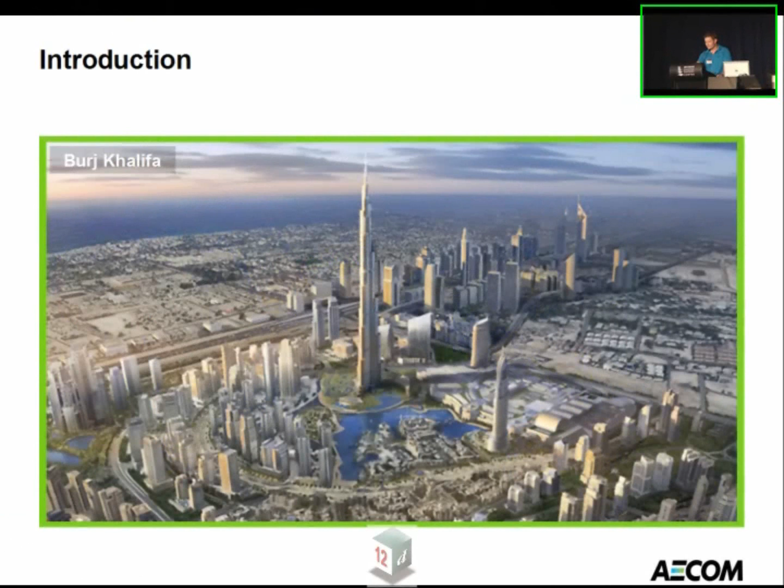We're also going to be talking about the UAE. Everybody knows the glitzy attractions in Dubai, still making headlines recently with the opening of the world's tallest building, the Burj Dubai, now known as the Burj Khalifa, named after this man, Sheikh Khalifa.

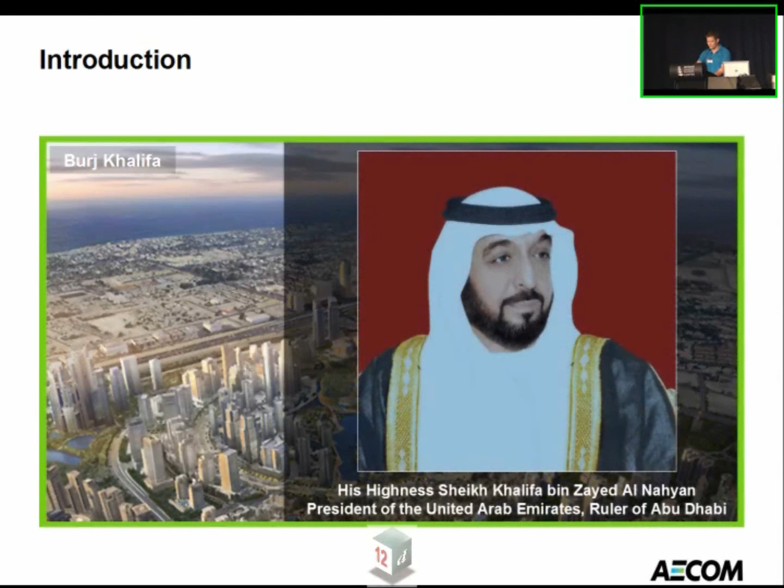Which brings me to the area I'm going to talk about, Abu Dhabi. Once the conservative neighbour of Dubai and labelled the richest city in the world, Abu Dhabi is starting to do some big projects of its own, but with a difference to Dubai.

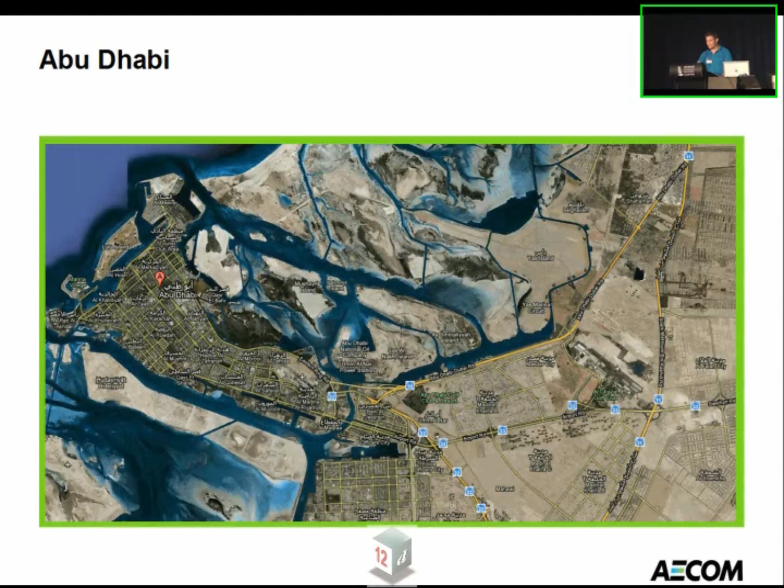This is the map of Abu Dhabi. The project I'm going to be speaking about is the Raha Beach project, for which Aecom is the main consultant. Raha Beach will be the gateway to Abu Dhabi, lies amongst the islands of Abu Dhabi and on the beach side of the Dubai-Abu Dhabi highway.

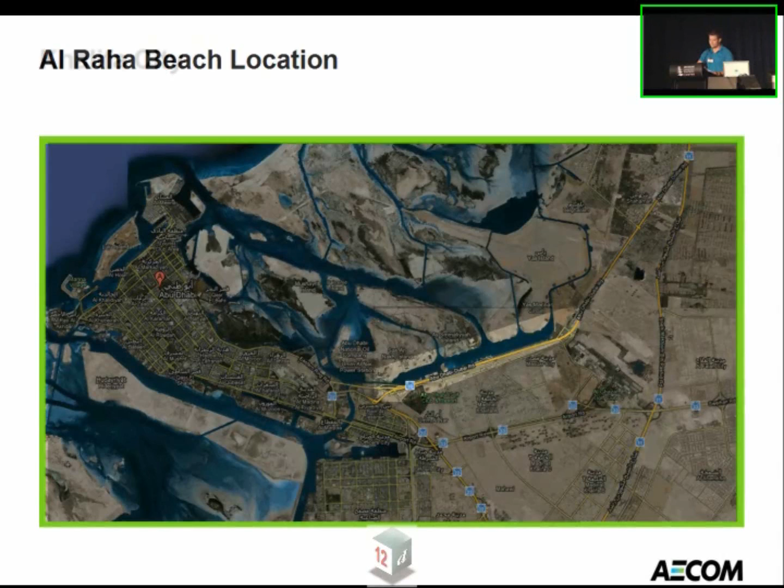The area around Abu Dhabi itself, the area around Raha itself is bursting with development. Surrounded by Khalifa City, a $40 billion US master plan comprising residential, government offices and embassies. This development is expected to continue through to 2030.

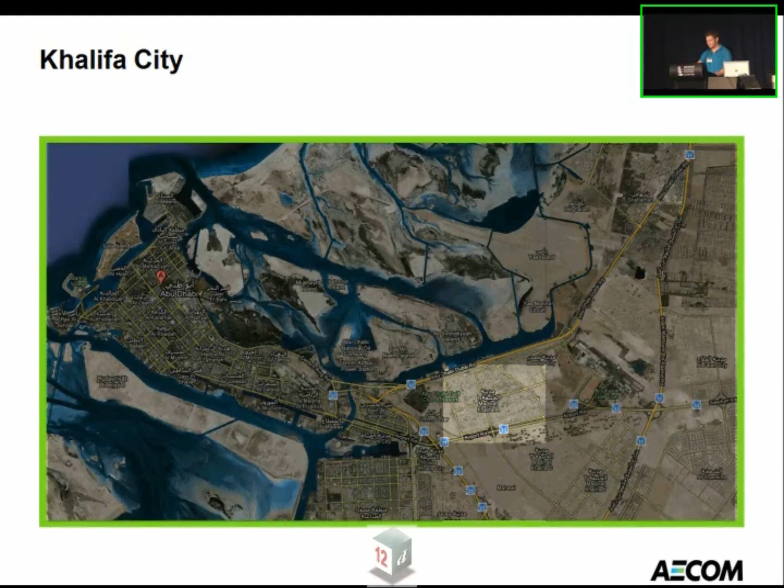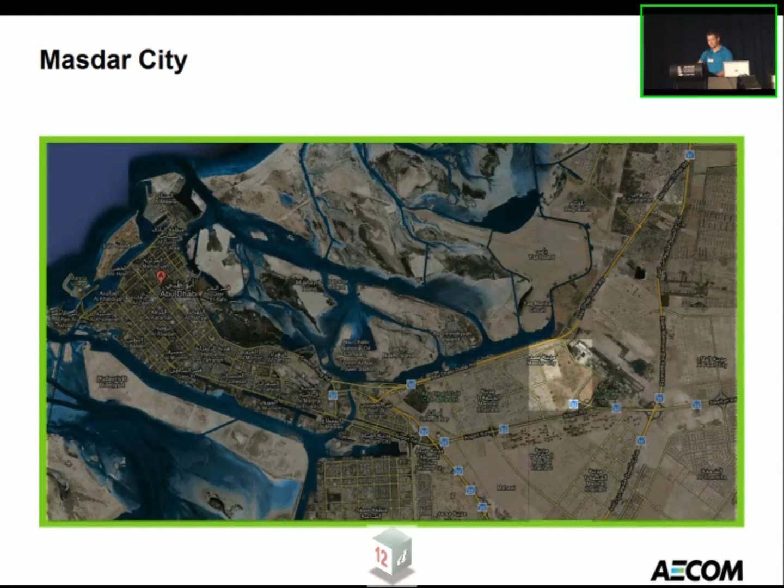There is the environmentally ambitious Masdar City. This is the first planned zero carbon, zero waste city, fully powered by renewable energy. It will become home to the IRENA headquarters, which is the International Renewable Energy Agency.

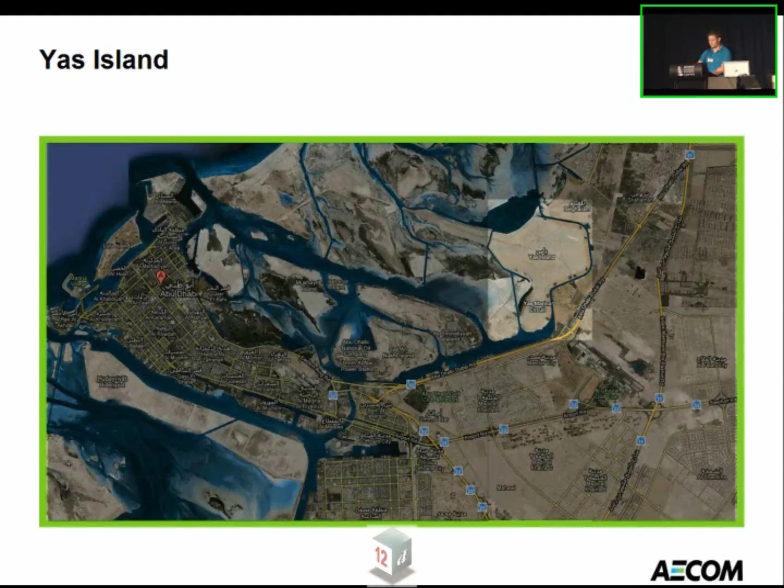Opposite Al Raha is the Yas Island development. Formula One fans here, this is the home of the Yas circuit in the championship. It will also consist of other tourist developments, hotels, beaches, marinas, retail, golf, and restaurant facilities.

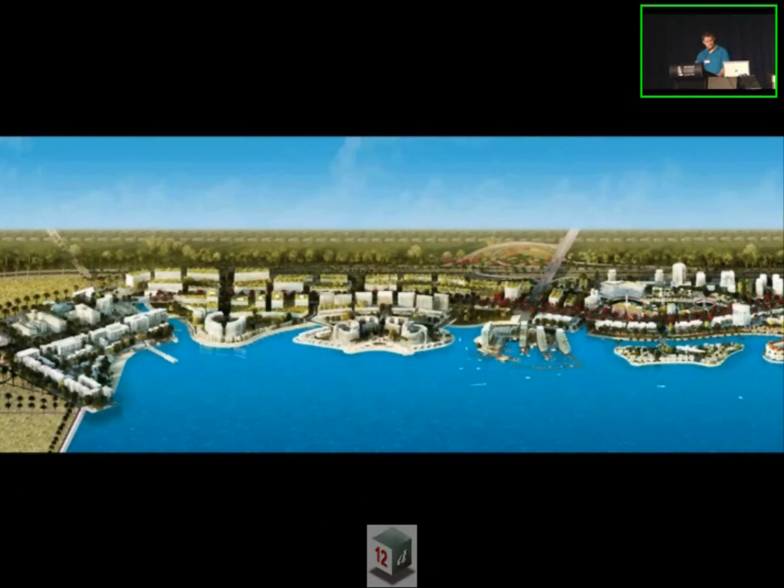Raha Beach has an infrastructure budget of approximately $18.5 billion US. It will be a mixed-use hospitality development, mainly built on reclaimed land. By this, I mean over 5.2 square kilometres, stretching approximately 10 kilometres.

It will consist of 11 different precincts, with a range of luxury villas, apartments, townhouses, elaborate office towers, restaurants, public and private marinas, and in addition to a road network, you'll have the opportunity to travel via the Grand Canal, by boat, and water taxi.

The development will also be linked by boardwalks, though walking may not be a popular choice in summer. A light rail system will also link the precincts. To prevent an overly built-up appearance, there is a designated garden precinct and a significant amount of water features scattered throughout the development.

Raha Beach will house somewhere between 120 and 150,000 residents. It is expected completion around the year 2018.

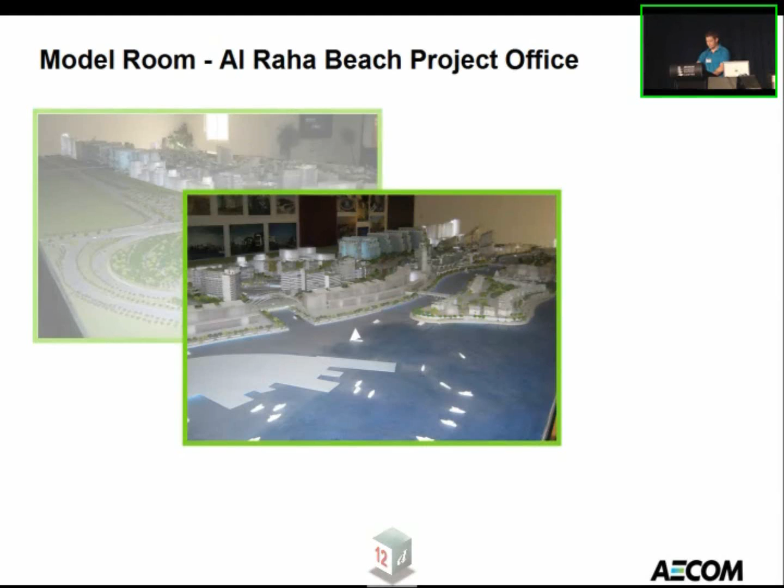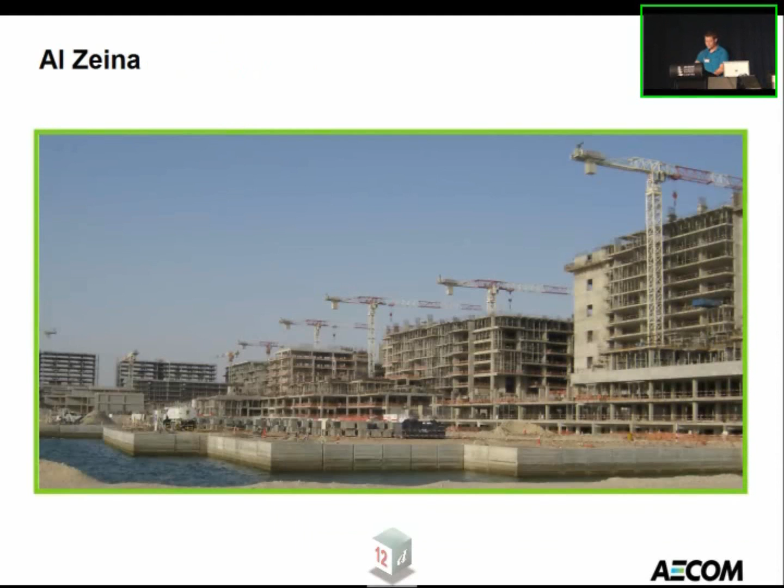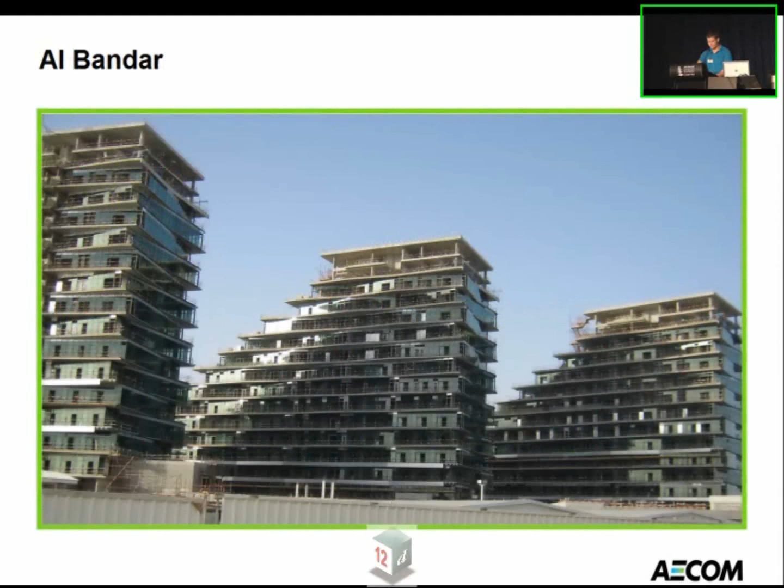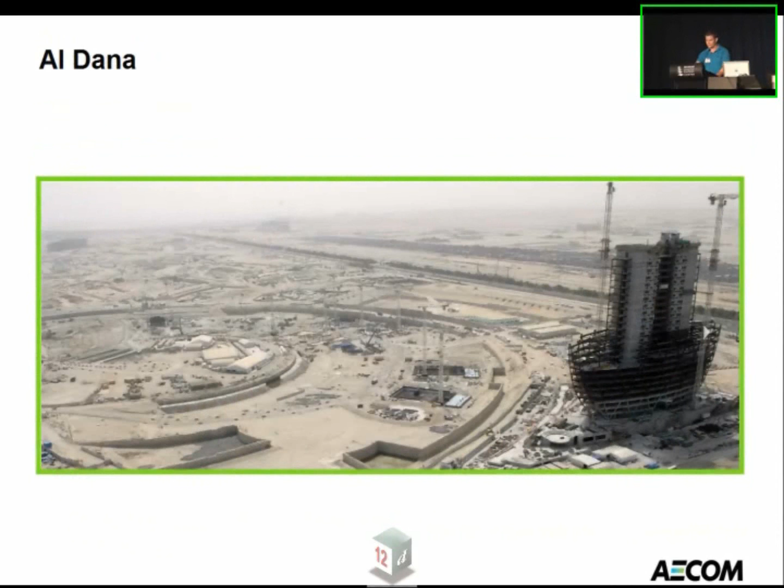This is the client's new headquarters. And of course the finished result of the main business precinct.

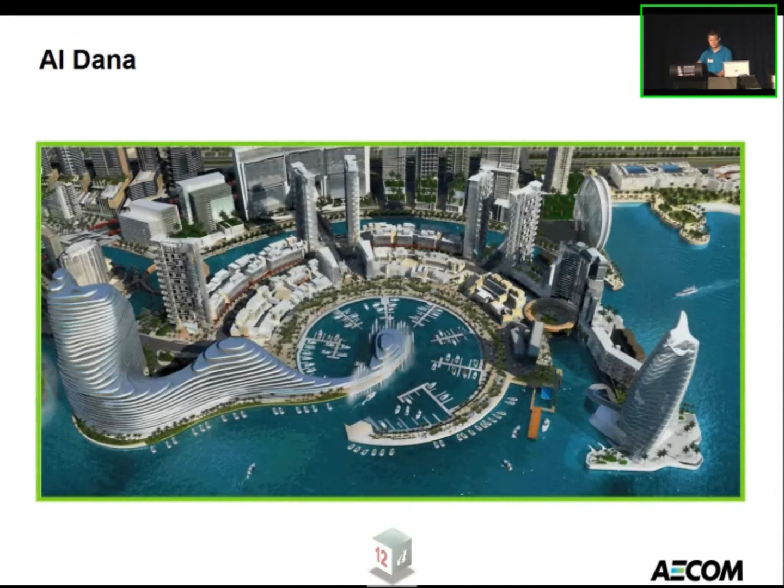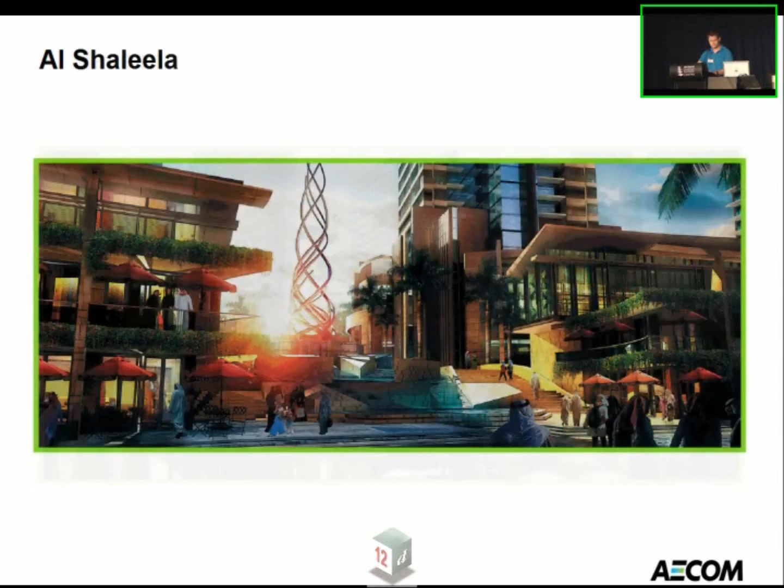To stand here and tell you how the entire project is being delivered using 12D, that simply isn't the case. This project has a different success story. You see, until May last year, 12D in AECOM Middle East did not exist.

So how was it introduced? If we go back to the start of 2009, a project manager from our Aecom Sydney office was sent to review and manage the Raha Beach project. All interchange packages were complete, and the project was approaching completion of the east package, leaving only the west.

The contractor threw a spanner in the works, demanding from Aecom a guarantee that there would be no clashes in the services corridors. This basically required all services to be designed in 3D.

The office approached this new requirement in the same manner most things are approachable in the UAE, by hand, slightly aided by AutoCAD, with a few LISP routines developed by a gentleman in the office.

You're probably thinking the same thing I did. In an effort to minimise workload and achieve completion date for the east, they only designed the intersections where services deviated from the standard corridors, creating conflicts. There are over 30 major intersections in the east package, and a similar number was expected in the west.

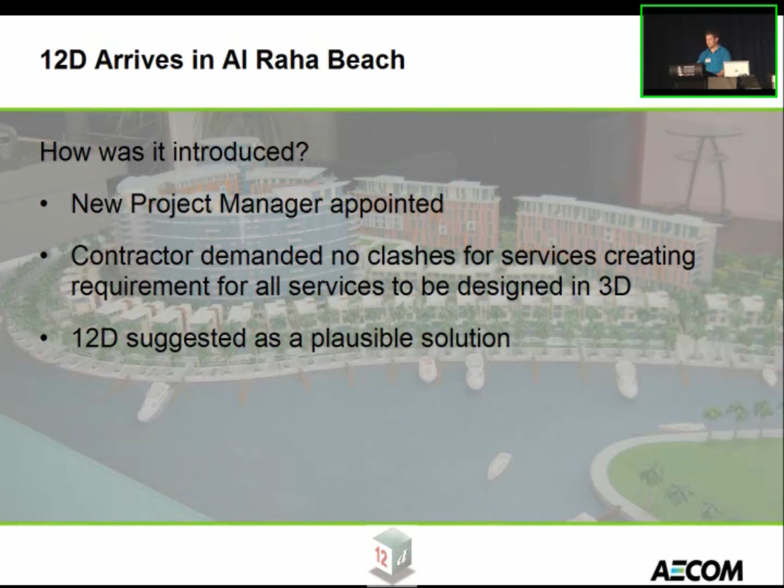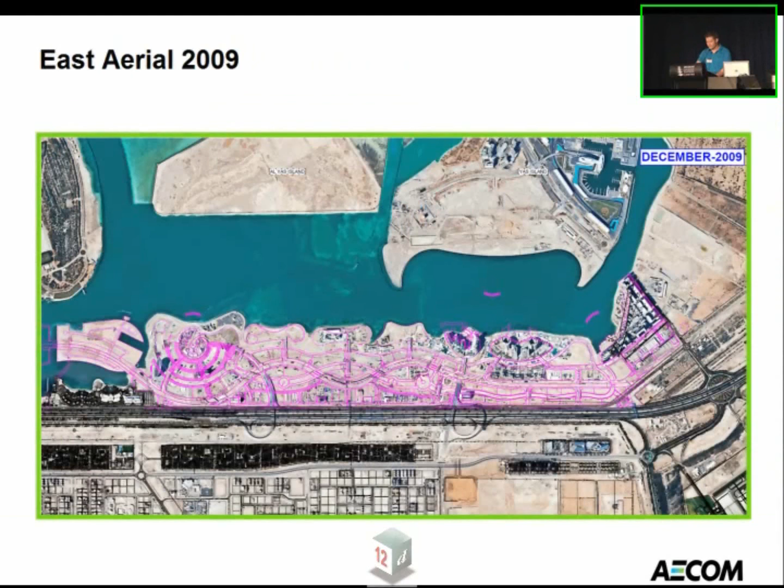This is the construction site with the master plan overlaid for the east. It's also showing some of the interchanges on the highway. Work so far for the west.

A bit of a comparison from when the design team started to current. As you can see, early reclamation works were already underway for the east.

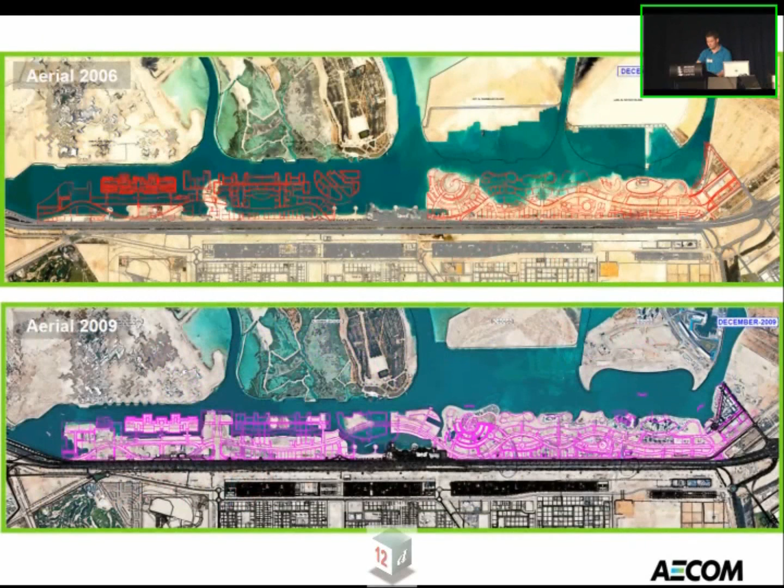So how did I get the gig? Well, about 2 years ago I started developing my own 12D training course, which targeted mainly new road designers. Since then, I've continued to refine the course based on the changing tools 12D has provided.

The course consists of the basics: setting up new projects, reading survey data with mapping files, horizontal and vertical alignments using super alignments, MTFs, apply many functions, computators, chains, and outputting, with a basic introduction to long and cross-section PPFs. All the essentials for a new user to commence a project under supervision.

But for Aecom, perhaps the most beneficial component of this training is to encourage adherence to the Aecom 12D design standards and procedures from the very beginning.

A combination, it appears, appealed to the Raha Beach project manager. He then contacted Joel Gregory, the UAE support manager, to purchase 5 initial licenses. With approximately 2 weeks' notice, I boarded a plane destined for Abu Dhabi on the 3rd of May last year.

Main objectives: set up a 12D system, train new users, and assist with workload.

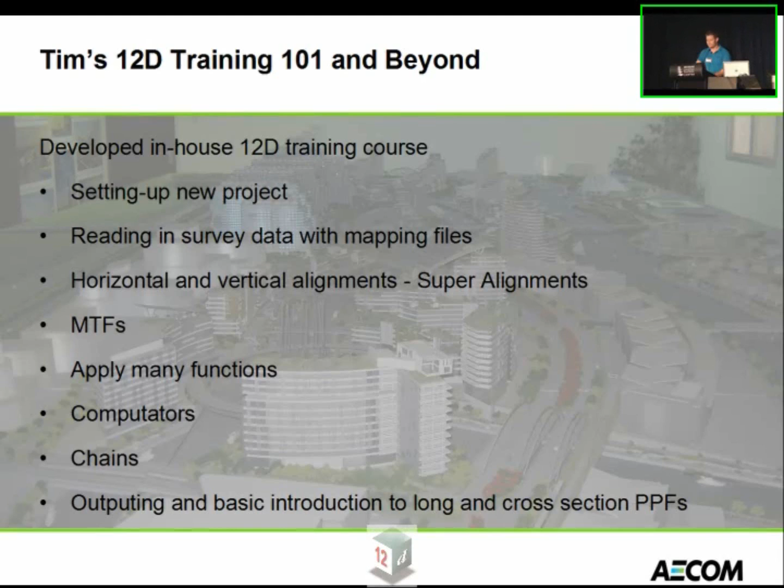So as you can imagine, at such short notice, I was not provided with much information on the project details or on any local standards and existing naming conventions. The plan: take the Brisbane office system and implement it in Abu Dhabi.

The Aecom Brisbane 12D standards and procedures are developed by our biggest 12D tragic, Steve Hunter. For those of you who attended the last conference, you may recall his presentation on these standards, or you may also recognise his name from the forums, where he has a large presence.

I think that's a result of reading too many comments from Lee on the forum. Either that or he's been visiting downstairs.

So anyway, though the Aecom Brisbane naming conventions are based on Queensland Main Roads Convention, Steve has developed our system to be flexible enough to accommodate individual project requirements and to allow other Aecom offices to adapt them to suit their local authority requirements.

As it turns out, there's no such thing as a standard naming convention in the UAE, so it was easy for me, simple copy and paste. The only major update required was to change the symbols file to match UAE standard pits, access chambers, etc.

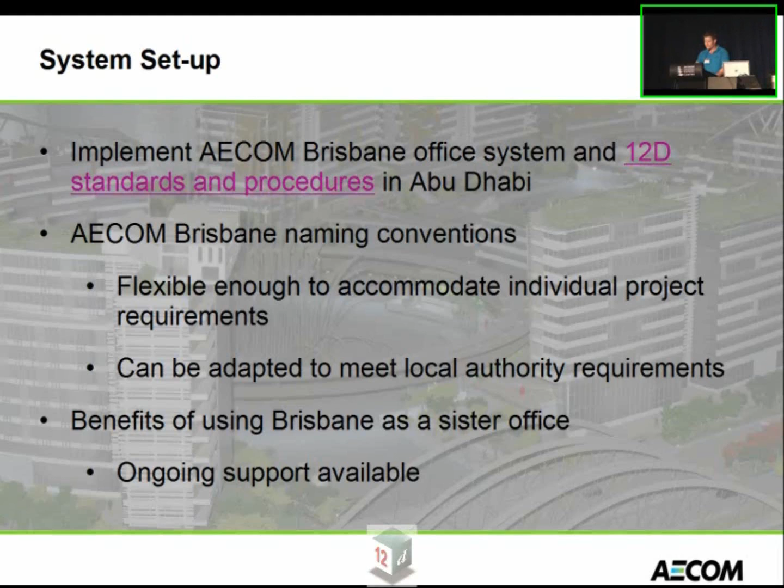An obvious benefit to using the Brisbane office as a sister office to Al Raha is the support Brisbane can offer through updates issued for implementation and procedures, as procedures are updated to capture the ever-evolving functions of 12D.

The client decided to add a vacuum waste system, so rubbish trucks would not be required to drive around the streets. Instead, they use the back service road to collect rubbish at a number of collection points. Fortunately, the manufacturer took care of this design, though it still needed to be considered.

The utility engineer compiled a list of services and all their different sizes. So my first step was to assign a unique string name for each and set a model for each group to go into.

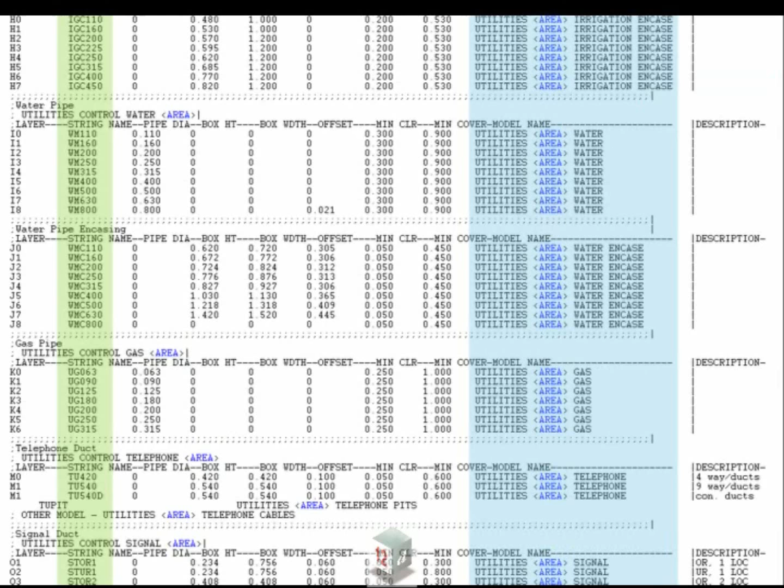I also had to edit the standard naming convention to suit the extra and different services. This simply required changing some to suit and adding others. And yes, that is chilled water.

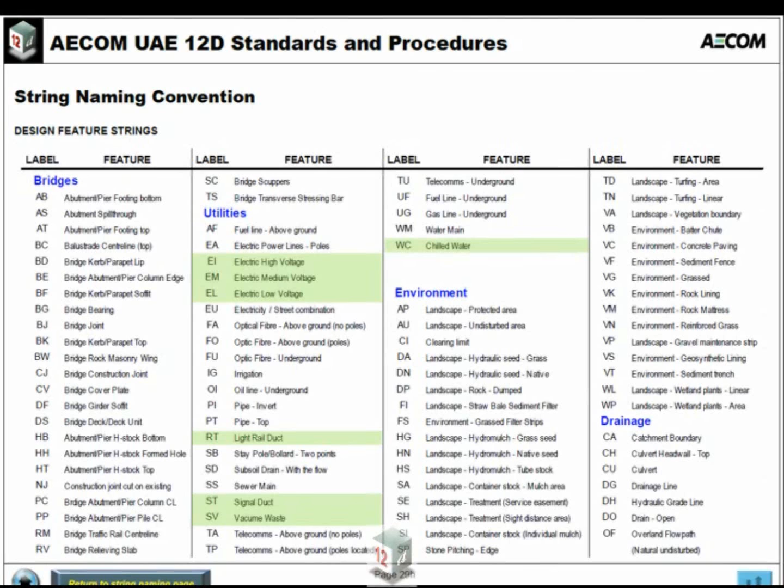So my normal routine revolves around road design in the transport section of Aecom. So modelling services was something slightly different and an interesting new challenge for me.

We all know superstrings will produce the desired result, the potential to be either culvert or pipe to any given dimension. But it simply didn't have the same tools as a super alignment for creating each service line.

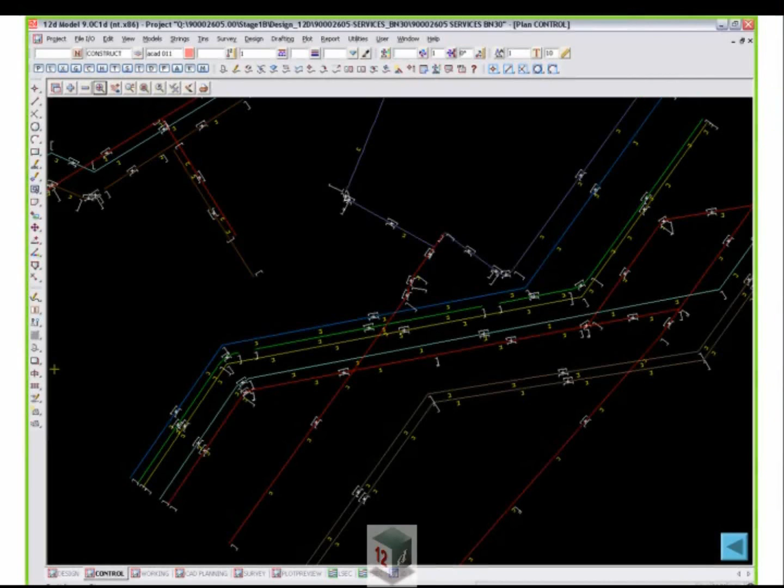So I decided to start with a control line, using a super alignment, much the same as a road centerline. This gave me the added benefit of being able to use computators.

For example, in horizontal, I had the option to link services that ran parallel to each other, and vertically, I could use partial drapes, where the service ran at its standard depth.

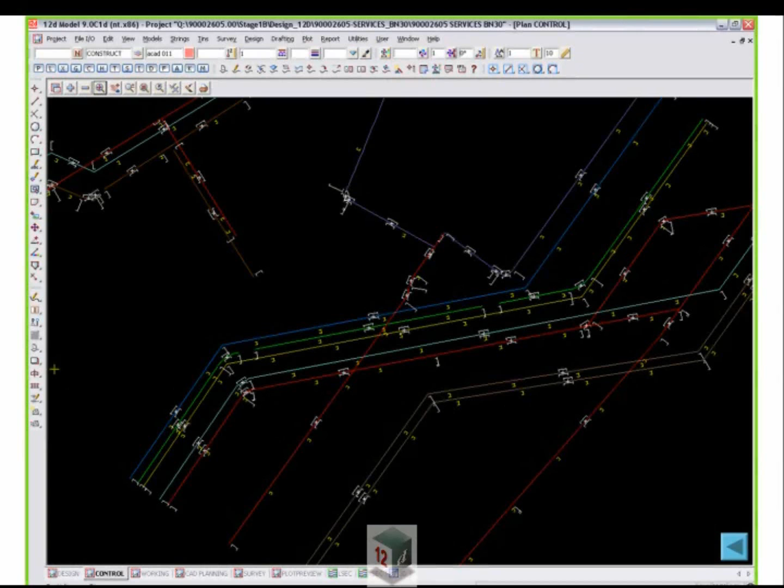I found super alignment easier in general, especially the vertical alignment. In fact, the most challenging task was converting grades to match pipe angles. Not hard at all.

So with the invert of the utility modelled, all that was required was to convert it back to a superstring and simultaneously copy it to a different model, leaving the original control line in case modifications needed to be made.

Assign either a pipe or culvert dimensions to the superstring, and of course the easiest way, create a map file, matching string name to size.

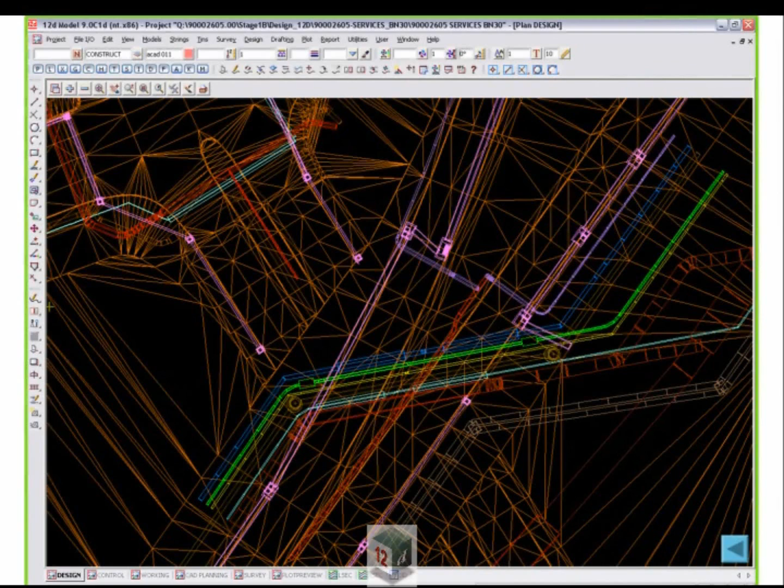Now the best part: record this process in a chain. Apply the convert and copy from super alignment to superstring, apply the map file, add clean models to the top of the chain, and then I had an automated process.

This design chain meant there was a recorded process applying the procedures. If a change is made to a level on the chain, the design is updated.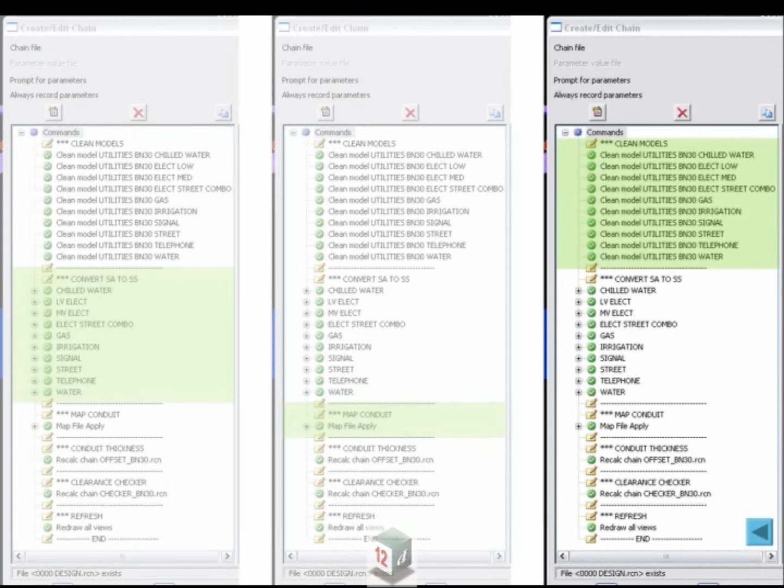All services have a minimum distance which another service cannot intrude, a clearance distance or clearance zone. I wanted to create a checker for this, an easy visual guide for the designer. Again, easy to do with another chain. Record and translate, or lower by the clearance distance, and at the same time copy to a checker model.

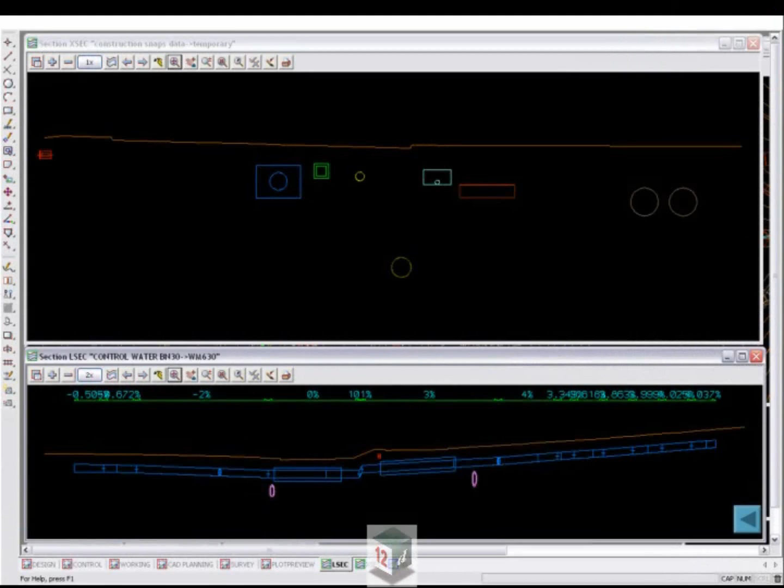Make a copy of the map file and add the clearance distance to the pipe culvert size. Add a clean model to the top of the chain, and when you run, you can turn the checker model on any view and you have an automated designer.

The best thing now is I only have to create these map files once. They can be used for any future services. Chains can be copied, just use TextPad to do a search and replace on model names. All fairly simple. In fact, the only thing that would make it easier would be if the gurus at 12D made a pipe design module.

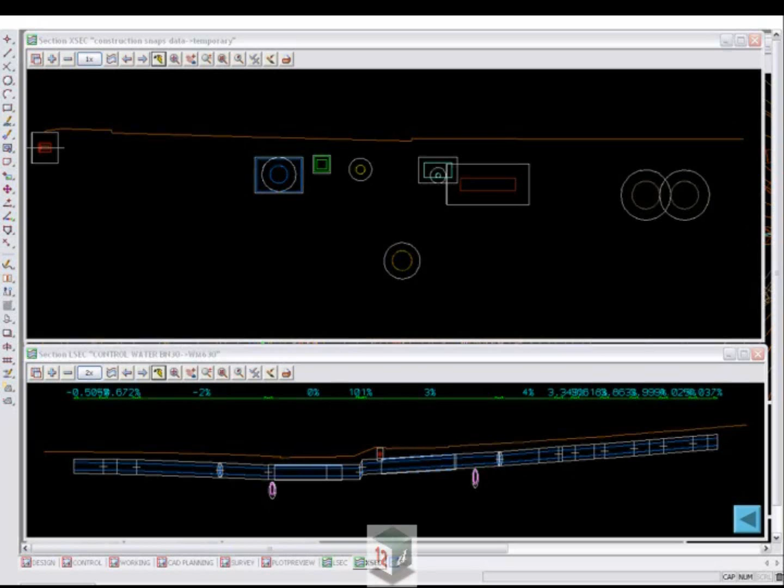Now the only thing left to do is create an AutoCAD drawing template and a map file to match for export. This resulted in a significant reduction in drafting requirements.

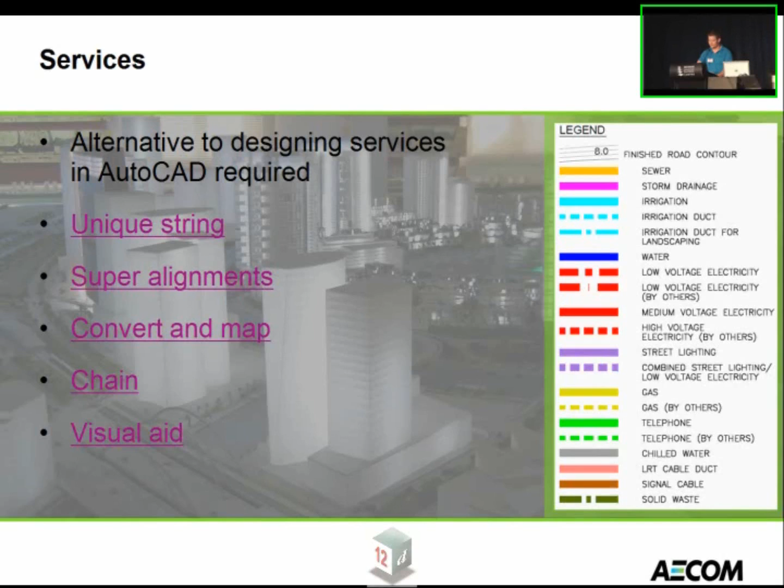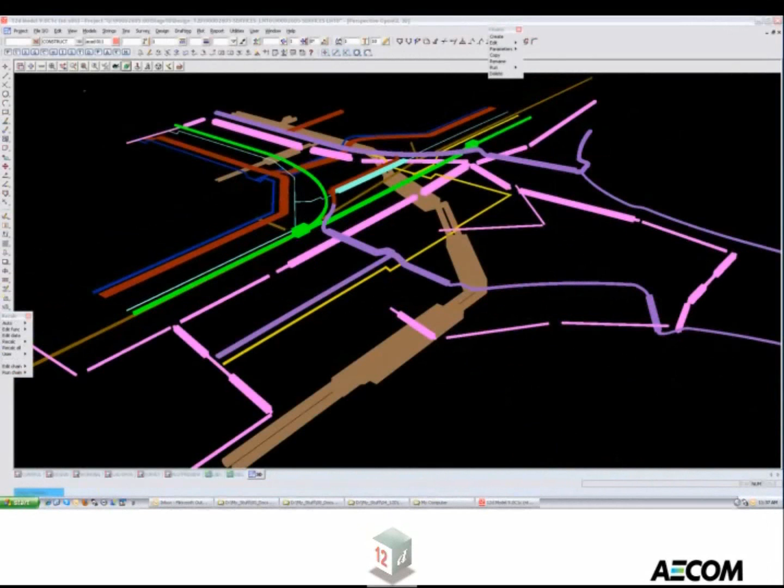After completing one of the intersections for the East, I was able to use it as a data set for training our utility engineers. Although for the East intersections were put together as a whole, the plan for the West was to model the entire services and separate into large groups. For example, stormwater and sewer would have their own projects, and the different kinds of water utilities may be grouped together, as to electrical, etc.

The services would also be broken up into different areas within the West package to allow for multiple designers. The 12D sharing feature could then be used to allow designers to interact with each other in a priority order.

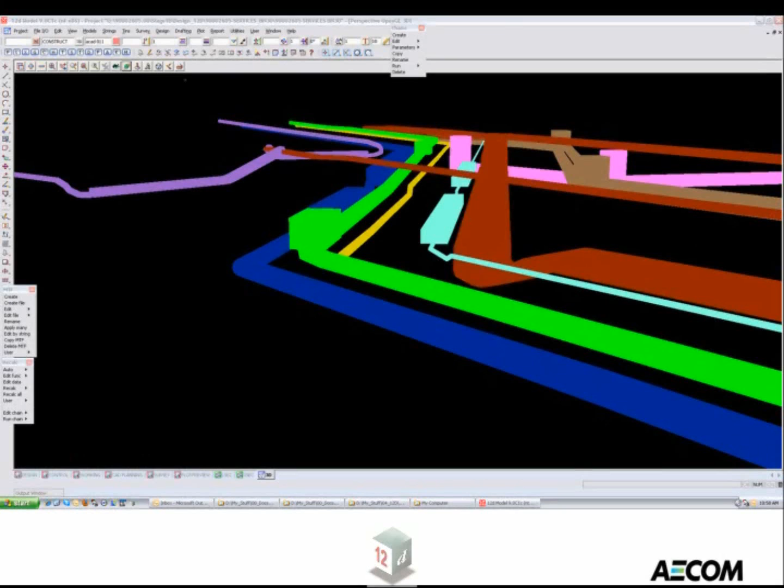So the road designers were pretty keen to switch to 12D after realising the benefit of the sharing feature. The managers also recognised the benefits in delivering the complete West package in 12D.

So a decision was made to train the road designers in 12D, which I already had my own training course for. After a couple of days with each designer, they were up and running with a very positive outlook in 12D. Even practicing in their own time while completing the East package.

Towards the end of my time in Abu Dhabi, Joel Gregory informed us that 12D drainage expert Rob Graham was scheduled for a visit to the UAE. So we were able to coordinate a 3-day drainage course for 5 of their utility engineers. Rob also assisted in setting up the drainage grid standards for the UAE.

Yes, it does rain there, at least once a year. This allowed for the complete 12D model for the West.

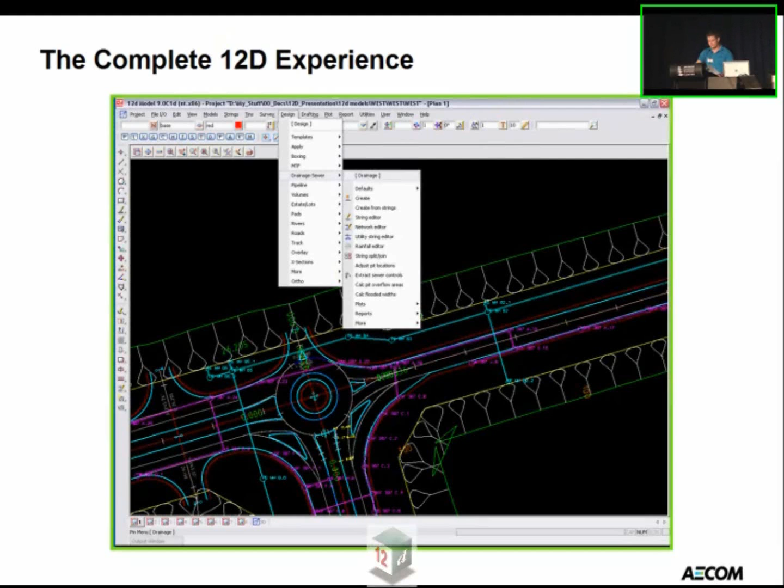This is how the Al Raha team set out the drainage for the East. Every time a change happened, these were updated manually. They were prone to error, not to mention very hard to verify.

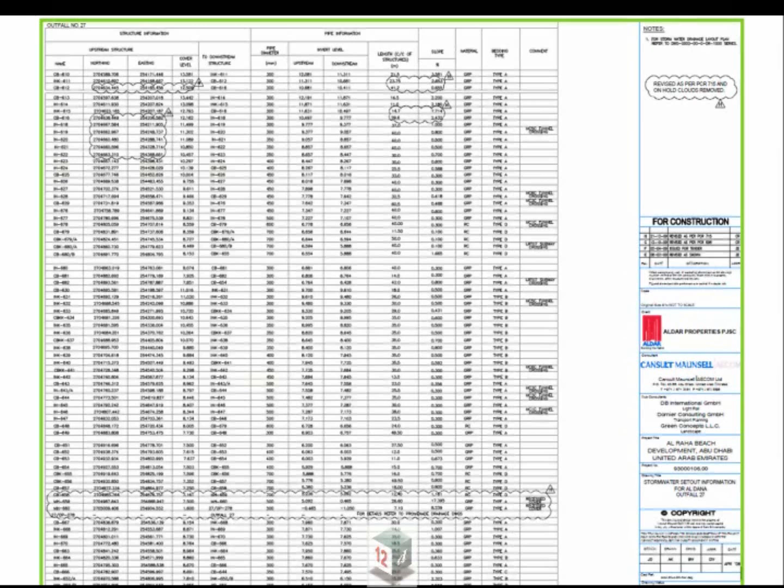This is a fully automated drainage long section on 12D for the West. It contains the same amount of information.

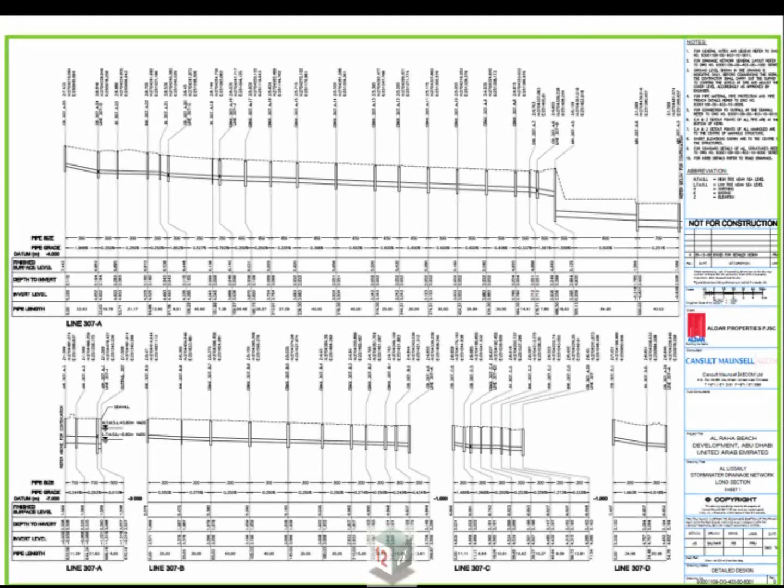So where's it all at? A little over 6 months down the track, pleased to say that Raha Beach is in 12D again. The project has undergone a radical transformation, and 12D has prompted the dropping of old methods and turned the project into something that more closely resembles the job we would do here.

The road, stormwater and sewer detailed design for the West package is about 50% complete, and other services are about to commence. The lead designer has even trained another designer up in 12D, and the client for Al Raha Beach has also given AECOM another job on Yas Island, an urban estate containing approximately 220 kerb returns.

So the guys there are trying tools like Create Roads Manager, something we don't get to use in the Brisbane office because we predominantly design homes.

So where to for AECOM UAE 12D? Well, due to the smooth transitioning of Al Raha Beach to 12D and the results it is achieving, our main Abu Dhabi office is now commencing trials.

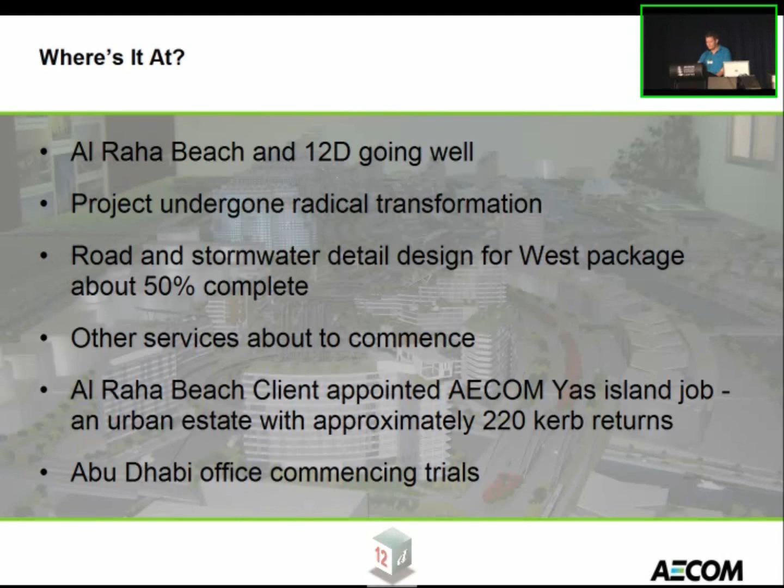This will promote an upskilling locally. For local offices in the UAE, doing a full 3D model is relatively unheard of. Only projects like Al Raha Beach do this. The only thing modelled normally is the central line.

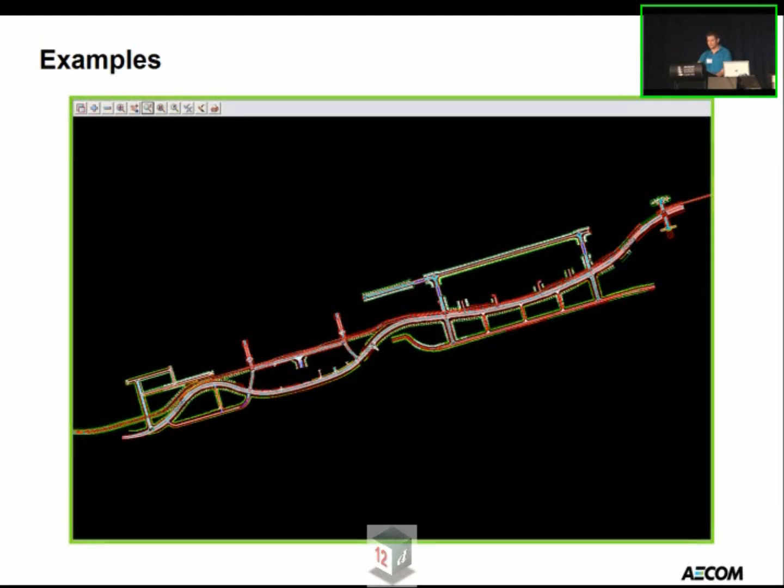So here are some examples that the team at Al Raha Beach has produced in 12D for the West package. I've even received an email a couple of weeks ago from their lead designer expressing his joy of using chains and computators because of the change they had to do.

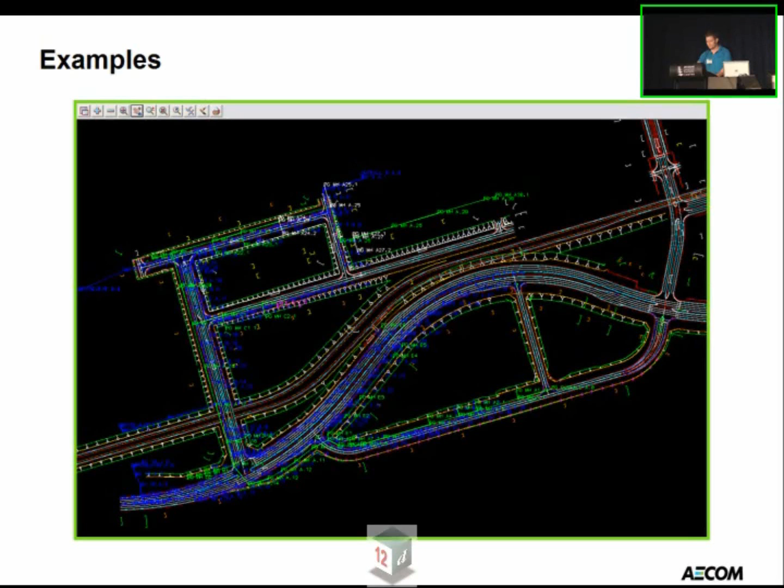An area on West design with the stormwater and sewer showing. That's something you can imagine in 3D.